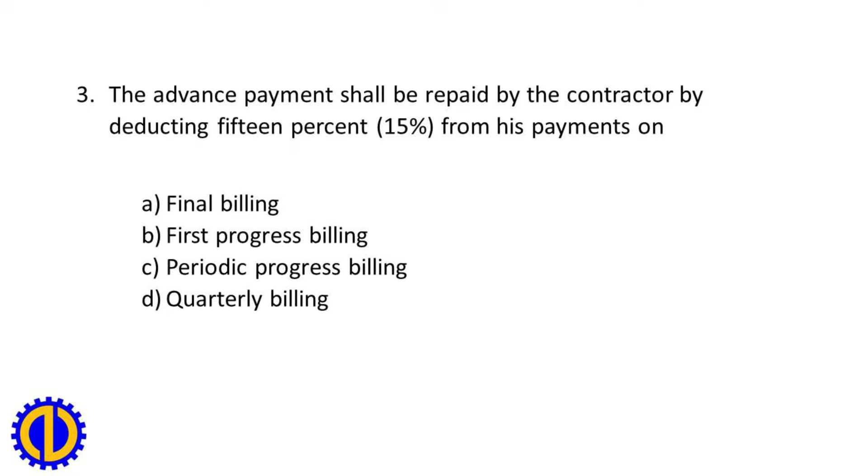3. The advance payment shall be repaid by the contractor by deducting 15% from his payments on A. Final billing. B. First progress billing. C. Periodic progress billing. D. Quarterly billing. C. Periodic progress billing.

4. How many times may the contractor submit a statement of work accomplished or progress billing and corresponding request for progress payment for work accomplished? A. Once a month. B. Twice a month. C. Once a year. D. Twice a year. A. Once a month.

5. Progress payments are subject to retention of 10% referred to as the A. Retention charges. B. Retention money. C. Recoupment. D. Insurance. B. Retention money.

6. Retention shall be based on the total amount due to the contractor prior to any deduction and shall be retained from every progress payment until 50% of the value of works. If, after 50% completion, the work is satisfactorily done and on schedule, no additional retention shall be made, otherwise, the 10% retention shall be imposed. A. True. B. False. A. True.

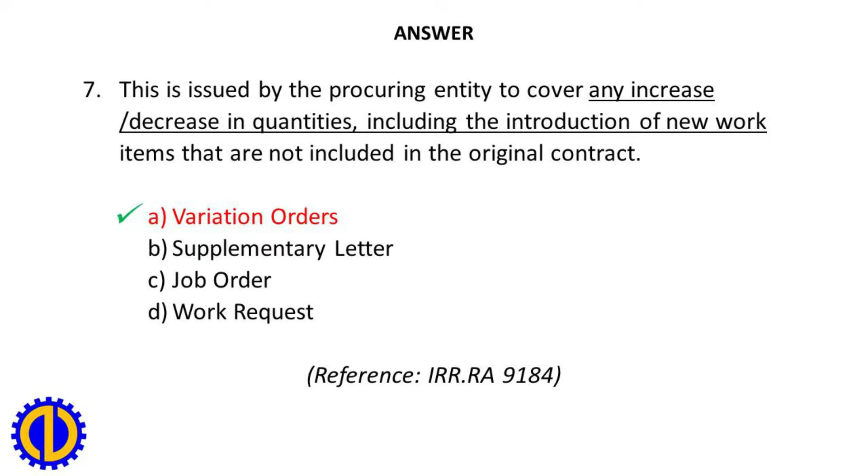8. May be issued by the implementing official to cover any increase, decrease in quantities of original work items in the contract. A. Job order. B. Extra work order. C. Change order. D. Work instruction. C. Change order. Keyword: change order is increase, decrease in quantities.

9. May be issued by the implementing official to cover the introduction of new work necessary for the completion, improvement or protection of the project which was not included as items of work in the original contract. A. Job order. B. Extra work order. C. Change order. D. Work instruction. B. Extra work order. Keyword: extra work order is new works.

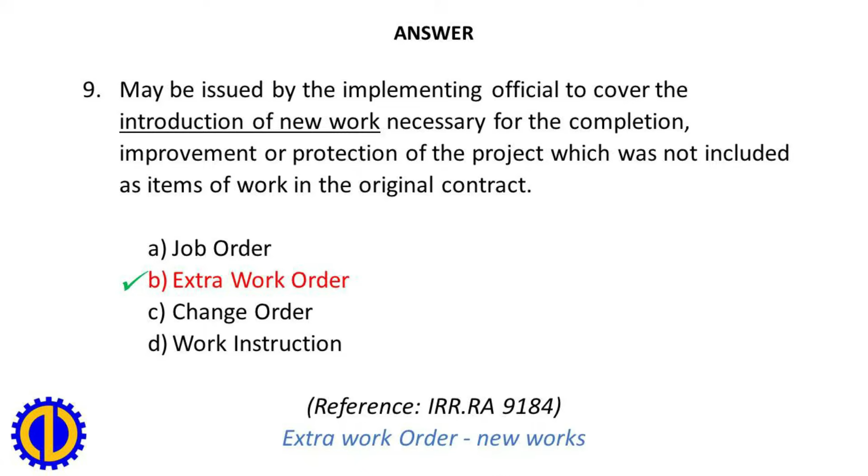10. Variation order does not exceed blank % of the original contract price. Any cumulative positive variation order beyond this shall be subject of another contract. A 5%. B 10%. C 15%. D 20%.

B 10%. Note: in exceptional cases, where it is urgently necessary to complete the original scope of work, the head of the procuring entity may authorize a positive variation order that will make the cumulative value of the positive variation orders go beyond 10% but not more than 20% of the original contract price, subject to the guidelines to be determined by the GPPB, provided, however, that appropriate sanctions shall be imposed on the designer, consultant or official responsible for the original detailed engineering design which failed to consider the variation order beyond 10%.

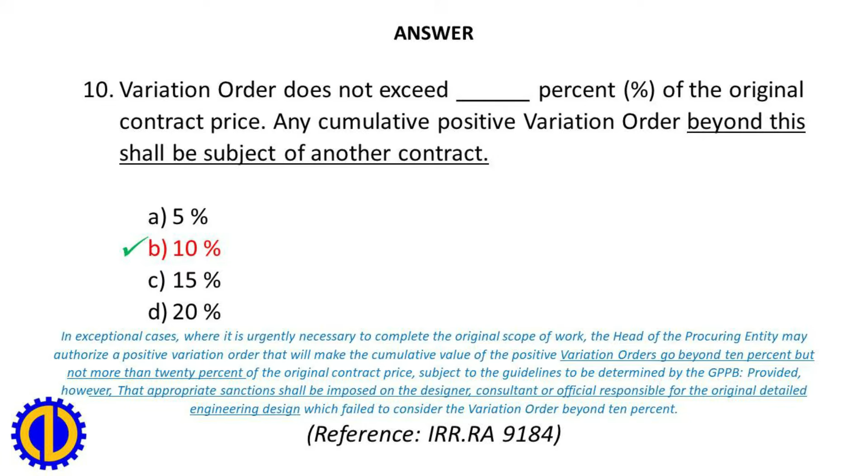11. An amount equal to 1/10 of 1% of the cost of the unperformed portion of the works for every day of delay. A. Retention money. B. Liquidated damages. C. Security bond. D. Performance bond. B. Liquidated damages.

12. Total sum of liquidated damages shall not exceed blank % of the total contract price, in which event the procuring entity concerned may rescind the contract. A 15%. B 10%. C 20%. D 5%. B 10%. For info: rescind the contract means the procuring entity automatically takes over or awards the same to a qualified contractor.

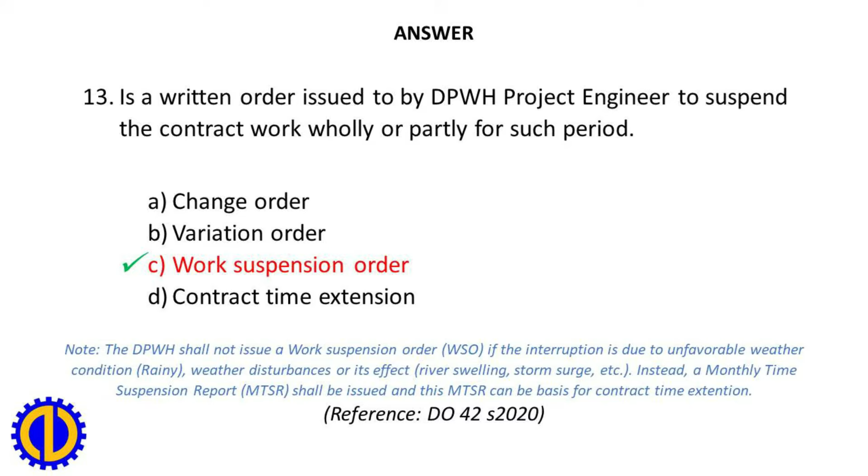13. Is a written order issued by the DPWH Project Engineer to suspend the contract work wholly or partly for such period? A. Change order. B. Variation order. C. Work suspension order. D. Contract time extension. C. Work suspension order. The DPWH shall not issue a work suspension order if the interruption is due to unfavorable weather condition, rainy weather, disturbances or its effect, river swelling, storm surge, etc. Instead, a monthly time suspension report shall be issued. Reference, Department Order 42 Series of 2020 or DO 42 S 2020.

14. Issued instead of work suspension order if suspension or unworkable days is due to unfavorable weather condition, rainy weather, disturbances or its effect, river swelling, storm surge, etc., or other conditions rendering the site unworkable occur intermittently. A. Change order. B. Monthly time suspension report. C. Work suspension order. D. Contract time extension.

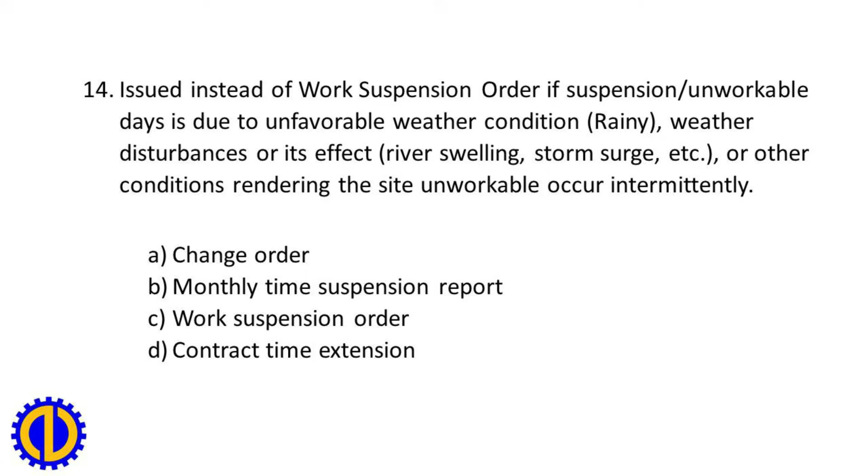B. Monthly time suspension report. For info: rainy, unworkable days including work activities for the day must be properly recorded and documented in the project logbook, project weather chart and geotagged pictures duly signed by the DPWH project inspector and project engineer.

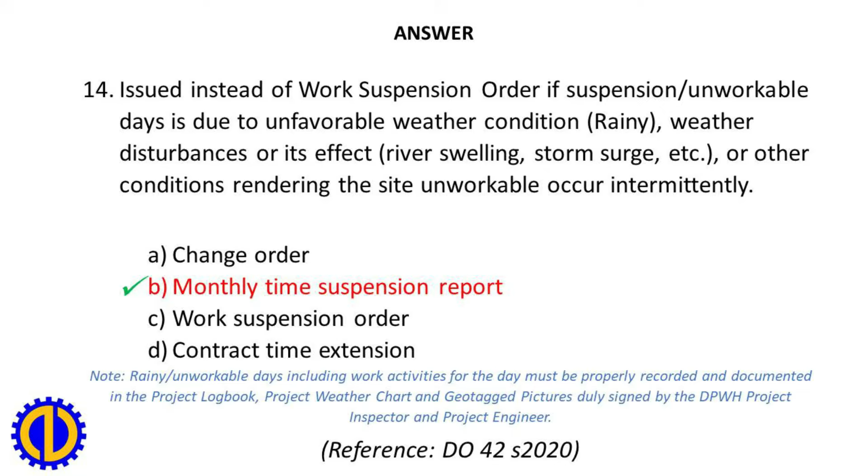15. The contractor shall have the right to suspend work operation on any or all project activities along the critical path of activities due to the following. A. There exist right-of-way problems which prohibit the contractor from performing work in accordance with the approved construction schedule. B. Requisite construction plans which must be owner-furnished are not issued to the contractor precluding any work called for by such plans. C. Peace and order conditions make it extremely dangerous, if not impossible, to work.

However, this condition must be certified in writing by the Philippine National Police Station which has responsibility over the affected area and confirmed by the Department of Interior and Local Government Regional Director. D. There is failure on the part of the procuring entity to deliver government-furnished materials and equipment as stipulated in the contract. E. Delay in the payment of contractor's claim for progress billing beyond 45 calendar days from the time the contractor's claim has been certified to by the procuring entity's authorized representative that the documents are complete unless there are justifiable reasons thereof, which shall be communicated in writing to the contractor.

A. A and B. B. B, C and D. C. C, E. D. All of the above. Answer: D, all of the above. Note: additional grounds for suspension of works are listed on DO 42/2020 of DPWH.

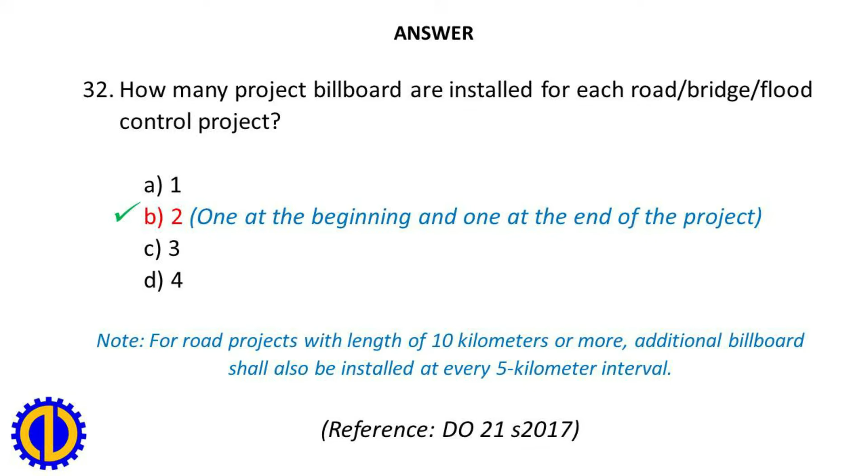33. What is the dimension of a DPWH project billboard? A. 2 feet by 4 feet. B. 3 feet by 6 feet. C. 4 feet by 8 feet. D. 8 feet by 16 feet. C. 4 feet by 8 feet.

34. Is the total estimated cost of the project which covers the civil works cost, engineering supervision, and administrative overhead, road right-of-way acquisition cost, construction contingency. Include information about the project location and limits, quantity and unit cost for each item of work, construction duration, funding source, equipment requirements, etc. A. Approved budget for the contract. B. Detailed unit price analysis. C. Program of works. D. Commission. C. Program of works.

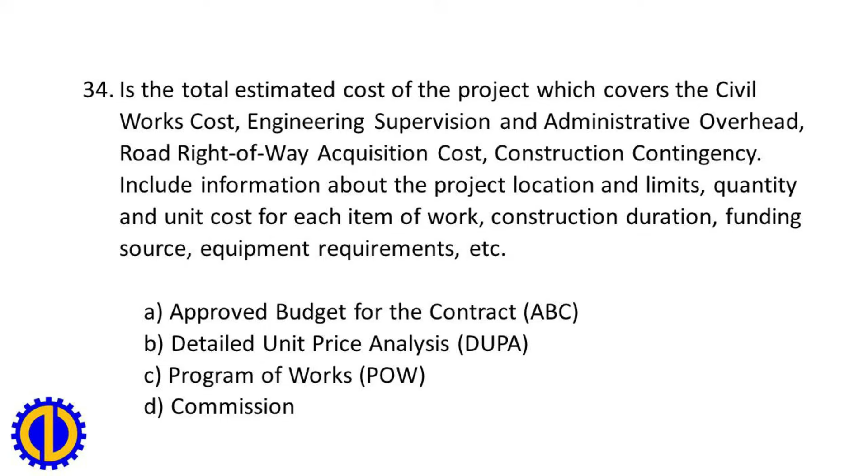35. Is the total estimated agency estimate, direct cost, indirect cost and tax, for civil works contract of infrastructure projects, wherein it is the ceiling of award of contract for government locally funded projects and reference for comparison of bid costs of contractors for both locally funded and foreign assisted projects. A. Approved budget for the contract. B. Detailed unit price analysis. C. Program of works. D. Commission. A. Approved budget for the contract.

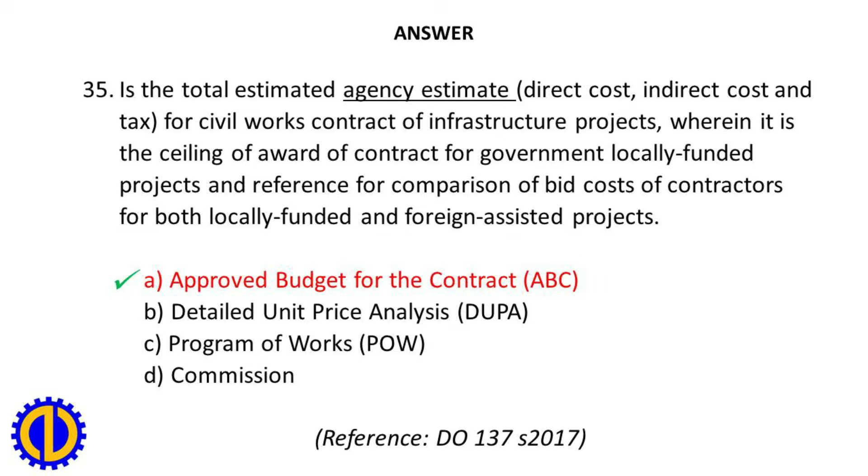36. Is the determination of reasonable unit cost of each item of work which reflects the breakdown showing the quantities of work items, unit prices of materials, equipment rental rates, labor rates and DPWH prescribed indirect costs including taxes. A. Approved budget for the contract. B. Detailed unit price analysis. C. Program of works. D. Commission. B. Detailed unit price analysis.

38. On the preparation of detailed unit price analysis, allowance for waste and/or losses shall not exceed blank % of the materials requirement. A. 10%. B. 8%. C. 7%. D. 5%. D. 5%.

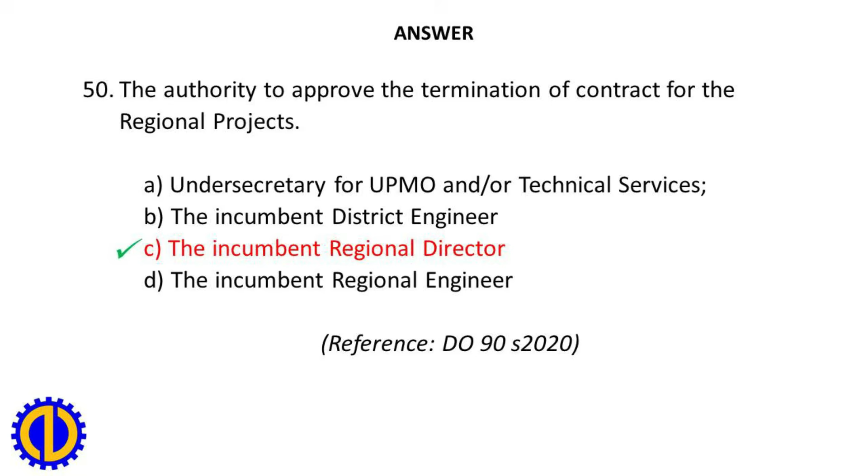50. The authority to approve the termination of contract for the regional projects. A. Undersecretary for UPMO and/or Technical Services. B. The incumbent district engineer. C. The incumbent regional director. D. The incumbent regional engineer. Answer: C. The incumbent regional director. Reference, DO 90S 2020.

51. Welcome arc/overhead boundary marker shall be provided with minimum vertical clearance of blank. A. 4.88 meters. B. 5.03 meters. C. 5.33 meters. D. 5.50 meters. Answer: C. 5.33 meters. Reference, DO 79S 2016.

52. For overhead utility and power lines crossing the roadway, vertical clearance shall not be less than blank from roadway surface. A. 4.88 meters. B. 5.03 meters. C. 5.33 meters. D. 5.50 meters. Answer: D. 5.50 meters.

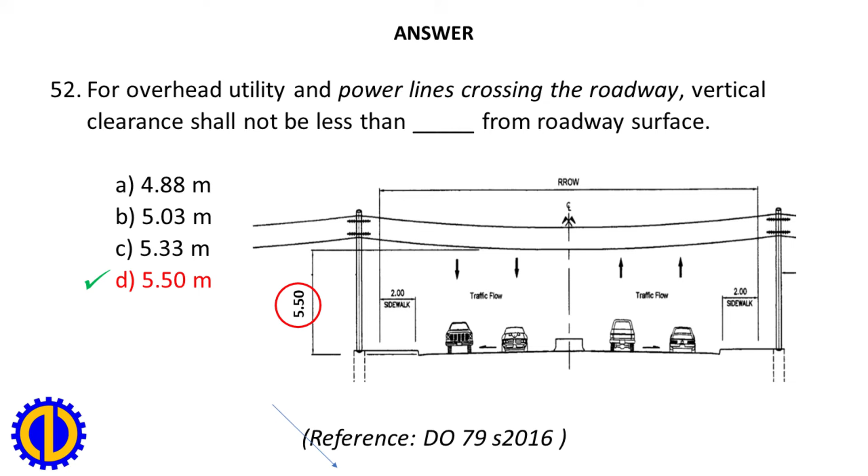53. For overhead utility and power lines from surface of sidewalks, vertical clearance shall not be less than blank. A. 4.88 meters. B. 5.03 meters. C. 5.33 meters. D. 5.50 meters. Answer: A. 4.88 meters.

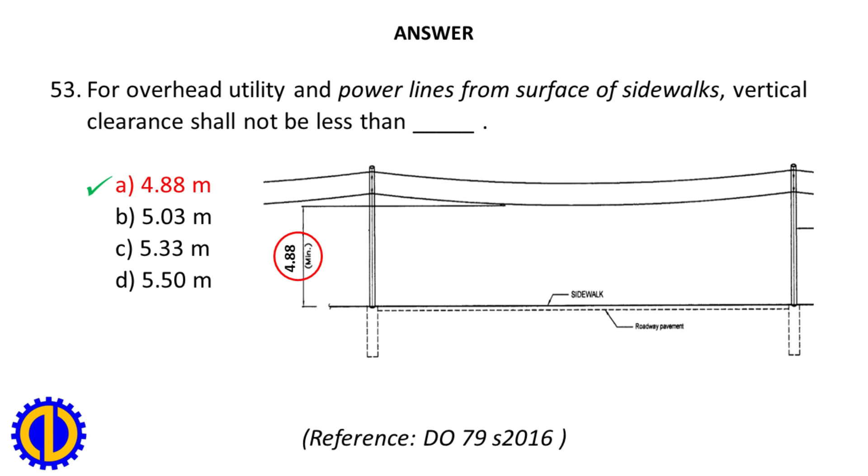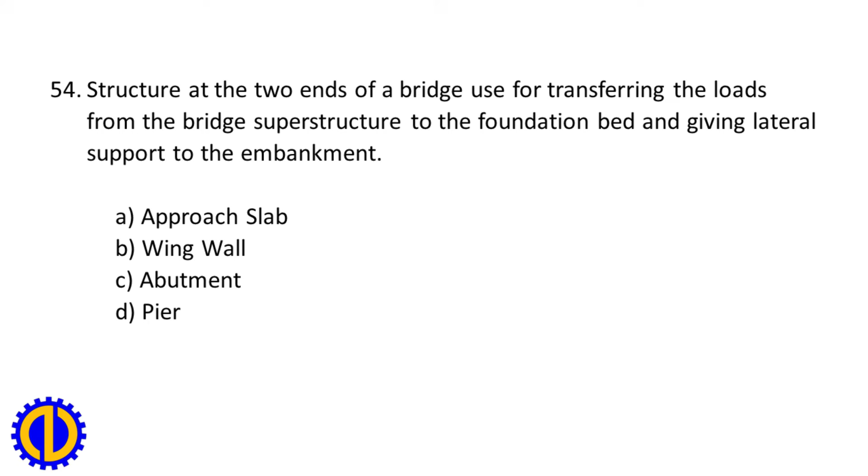54. Structure at the two ends of a bridge used for transferring the loads from the bridge superstructure to the foundation bed and giving lateral support to the embankment. A. Approach slab. B. Wing wall. C. Abutment. D. Pier. Answer: C. Abutment. Reference, DO 114S 2016.

55. For multi-span bridges, high strain pile dynamic test shall be conducted on bored pile foundation at what frequency? A. 1 at each abutment and 1 at every other pier. B. 1 at each abutment and 1 at each pier. C. 5% of the total number of bored piles. D. 1 bored pile representing each pile size. Answer: A. 1 at each abutment and 1 at every other pier. Reference, DO 37S 2016.

56. Pile integrity test shall be conducted on at least blank % of the total number of bored piles at each abutment and pier of bridges, or at the entire foundation area of a building. A. 25%. B. 30%. C. 40%. D. 50%. Answer: D. 50%.

57. How many % is the roadway cross slope for a Portland Cement Concrete Pavement? A. 0.5%. B. 1.0%. C. 1.5%. D. 2.0%. Answer: C. 1.5%. Reference, DO 112S 2019.

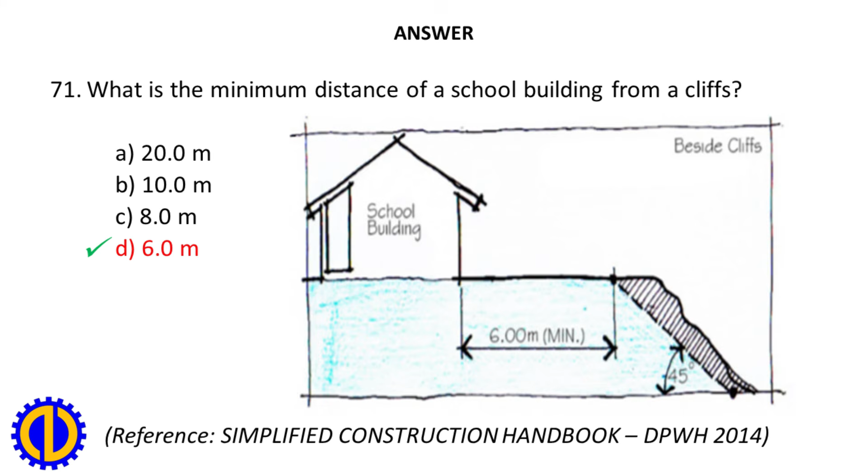72. What is the minimum distance of a school building from a power line tower? A. 20.0 meters. B. 10.0 meters. C. 8.0 meters. D. 6.0 meters. Answer: A. 20.0 meters.

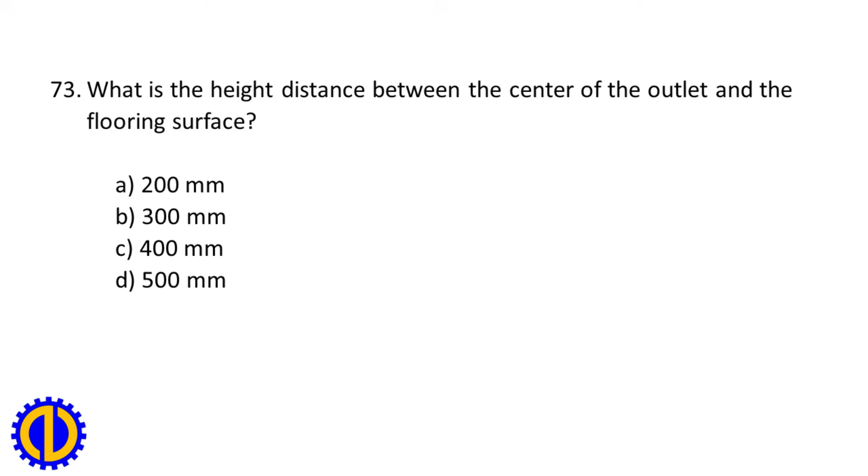73. What is the height distance between the center of the outlet and the flooring surface? A. 200 millimeters. B. 300 millimeters. C. 400 millimeters. D. 500 millimeters. Answer: B. 300 millimeters.

74. What is the height distance between the center of the switch and the flooring surface? A. 1.2 meters. B. 1.3 meters. C. 1.4 meters. D. 1.5 meters. Answer: C. 1.4 meters.

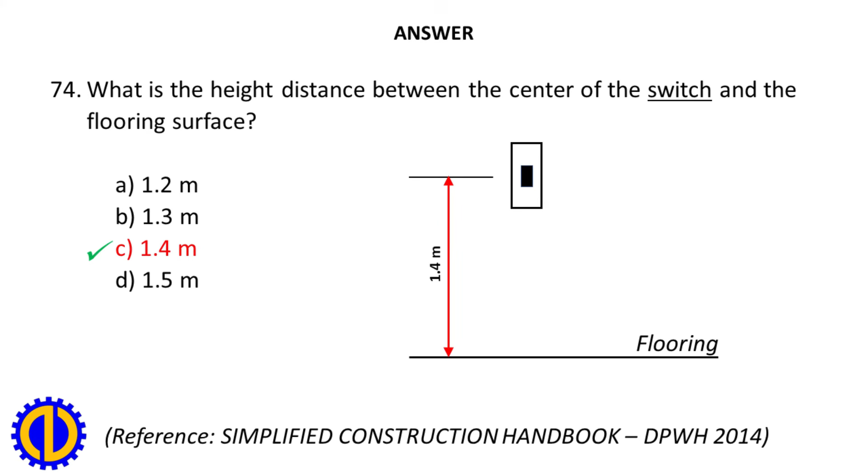75. An administrative penalty disqualifying a person or an entity from participating in any government procurement for a given period. A. Suspension. B. Blacklisting. C. Liquidated damages. D. Termination. Answer: B. Blacklisting. Reference, DPWH Procurement Volume 1, June 16, 2016.

76. Is the allowance in height from the river waterline to crest of a revetment, dam, dike or a levee, or from the river waterline to the lowest part of the superstructure to avoid submergence during high water levels? A. Overflow. B. Freeboard. C. Spillgate. D. Spillway. Answer: B. Freeboard. Reference, DO 114 S. 2016.

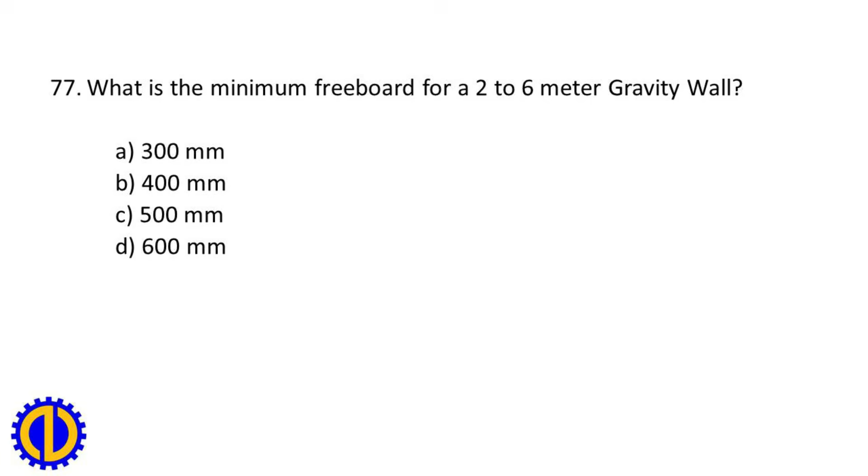77. What is the minimum freeboard for a 2 to 6 meter gravity wall? A. 300 millimeters. B. 400 millimeters. C. 500 millimeters. D. 600 millimeters. Answer: D. 600 millimeters. Reference, DO 100 S. 2020.

78. Soil or earth material which has been deposited by running water. A. Alluvial. B. Mud. C. Silt. D. Sludge. Answer: A. Alluvial. Reference, DO 114 S. 2016.

79. A horizontal strip or shelf built into an embankment or cut, to break the continuity of an otherwise long slope. A. Berm. B. Bench. C. Trial strip. D. Landing. Answer: A. Berm. Reference, DO 114 S. 2016.

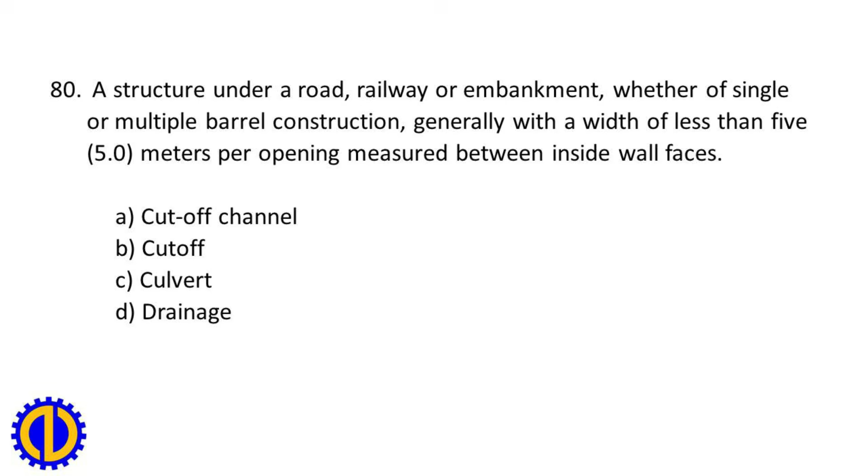80. A structure under a road, railway or embankment, whether of single or multiple barrel construction, generally with a width of less than 5 meters per opening measured between inside wall faces. A. Cutoff channel. B. Cutoff. C. Culvert. D. Drainage. Answer: C. Culvert. Reference, DO 114 S. 2016.

81. An alternative method of procurement of goods from the previous winning bidder, whenever there is a need to replenish goods procured under a contract previously awarded through competitive bidding. A. Repeat order. B. Limited source bidding. C. Direct contracting or single source procurement. D. Negotiated procurement. Answer: A. Repeat order. Reference: DO 114 S. 2016 and IRR-RA 9184.

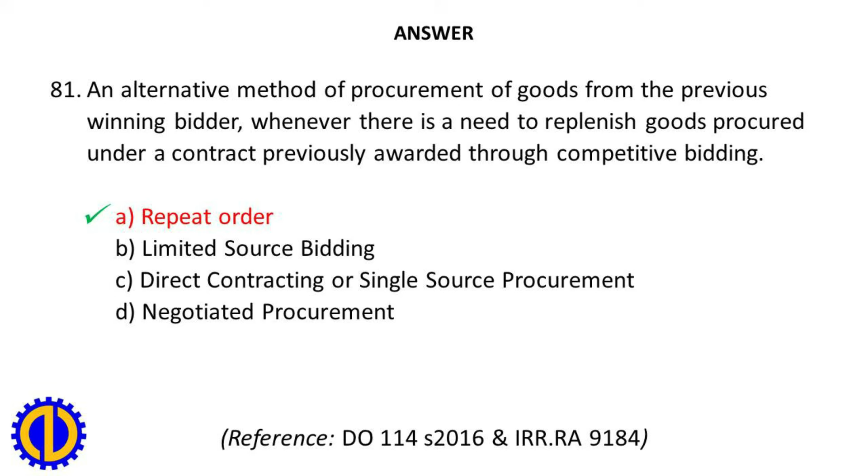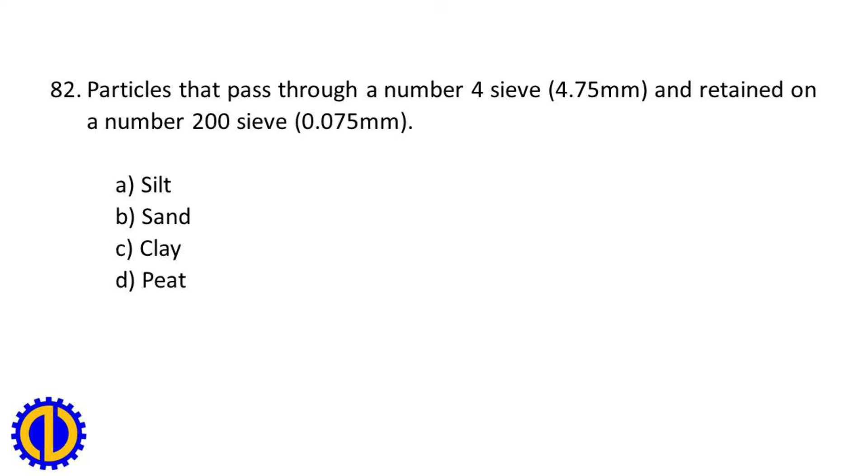82. Particles that pass through a number 4 sieve, 4.75 mm, and retained on a number 200 sieve, 0.075 mm. A. Silt. B. Sand. C. Clay. D. Peat. Answer: B. Sand. Reference: DO 114 S. 2016.

83. A flood control structure to reduce the flow velocity near the bank by directing the flow away from the bank and in order to protect the riverbank from collapse. A. Spur dike. B. Dam. C. Revetment. D. Detour. Answer: A. Spur dike. Reference: DO 114 S. 2016.

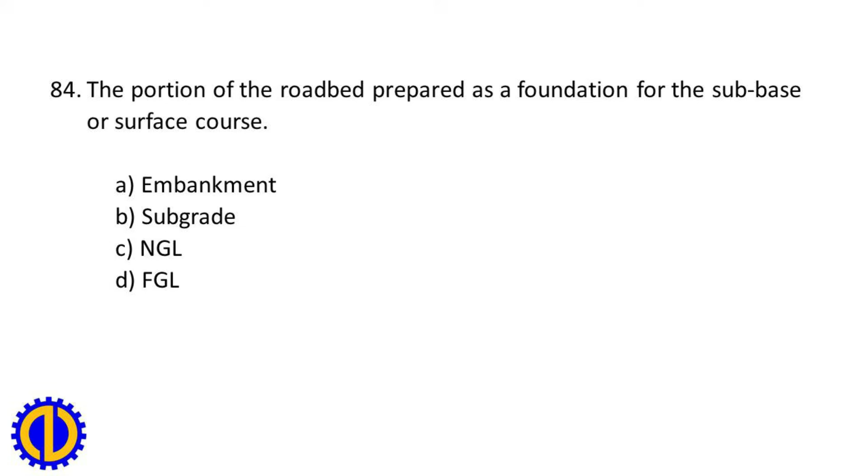84. The portion of the roadbed prepared as a foundation for the sub-base or surface course. A. Embankment. B. Subgrade. C. NGL. D. FGL. Answer: B. Subgrade. Reference: DO 114 S. 2016.

85. What is the longitudinal grade for roads? A. Minimum of 0.50% on cut and maximum of 12% on cut/fill section. B. Minimum of 1.00% on cut and maximum of 10% on cut/fill section. C. Minimum of 1.50% on cut and maximum of 12% on cut/fill section. D. Minimum of 2.00% on cut and maximum of 10% on cut/fill section.

A. Minimum of 0.50% on cut and maximum of 12% on cut/fill section. Reference: DO 112S 2019.

86. What is the maximum permissible variation in actual weight of a steel bar from the theoretical weight? A. 6%. B. 7%. C. 8%. D. 9%. Answer: A. 6%. Reference: PNS 49, 2020.

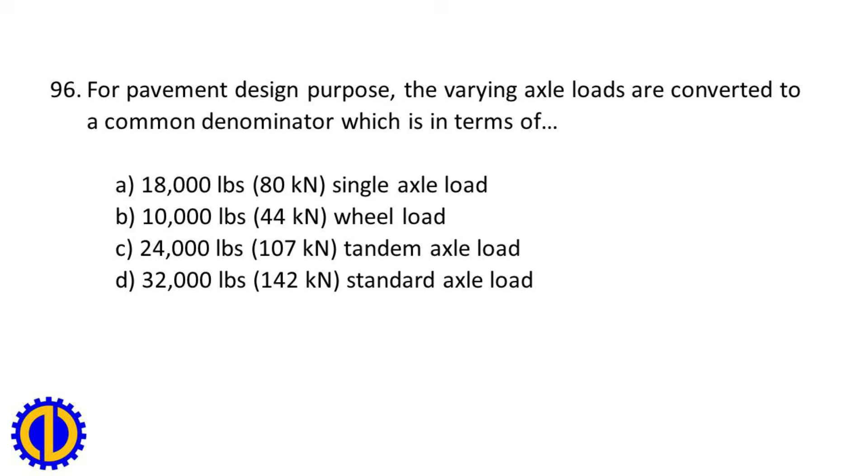96. For pavement design purpose, the varying axle loads are converted to a common denominator which is in terms of: A. 18,000 pounds, 80 kilonewtons, single axle load. B. 10,000 pounds, 44 kilonewtons, wheel load. C. 24,000 pounds, 107 kilonewtons, tandem axle load. D. 32,000 pounds, 142 kilonewtons, standard axle load. Answer: A. 18,000 pounds, 80 kilonewtons, single axle load. Reference: AASHTO Guide for Design of Pavement Structures 1993.

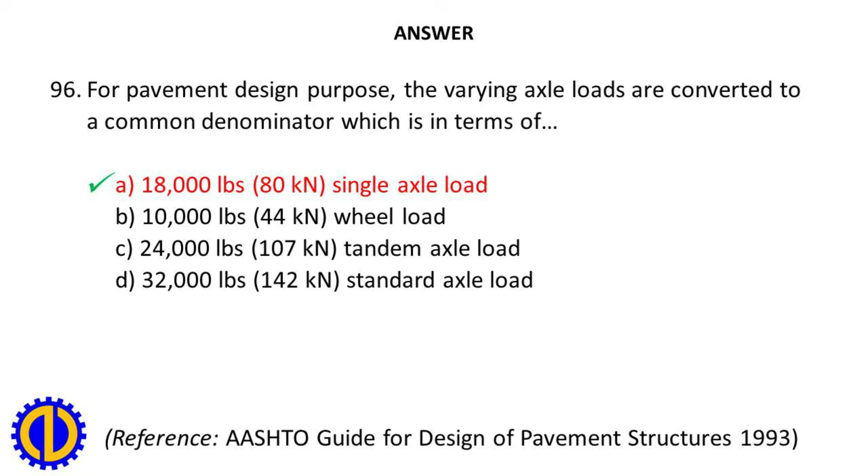97. The minimum pavement width of carriageway for a national road shall be blank. A. 5 meters for 2 lanes. B. 5.8 meters for 2 lanes. C. 6.1 meters for 2 lanes. D. 6.7 meters for 2 lanes. Answer: D. 6.7 meters for 2 lanes. Reference: DO 22S 2011.

98. What is the prescribed concrete structure for a bridge with span of 13 to 20 meters? A. Flat slab bridge. B. Reinforced concrete deck girder bridge. C. Pre-stressed concrete girder bridge. D. Cable bridge. Answer: B. Reinforced concrete deck girder bridge. Reference: DO 30S 2011.

99. Depth of exploration for a highway project with light cut and fill where there is no special problem should extend to a maximum depth of blank. A. 1 meter below bottom of subbase. B. 1.5 meters below bottom of proposed subgrade. C. 2 meters below bottom of subbase. D. 2.5 meters below bottom of proposed subgrade. Answer: B. 1.5 meters below bottom of proposed subgrade. Reference: Terms of Reference for Consultancy Services, Highway and Bridge Detailed Engineering Design.